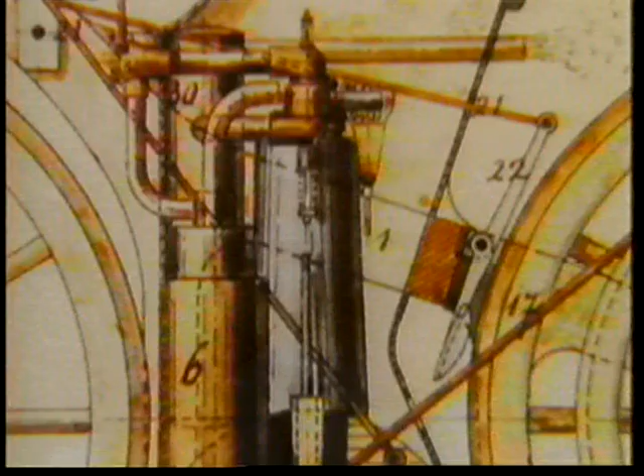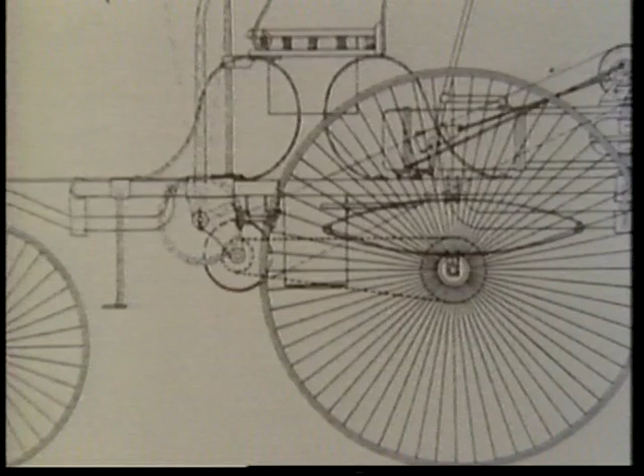Daimler was first to see the wide variety of uses for the gasoline-burning internal combustion engine. The success of his first vehicle, a motorcycle, convinced him that by installing his engine in a carriage, he could finally replace the horse. At the same time, Carl Benz, unaware of the work being done by Daimler only 60 miles away, was developing his own vehicle. But while Daimler was installing his engine in a carriage, Benz was creating the world's first automobile from scratch.

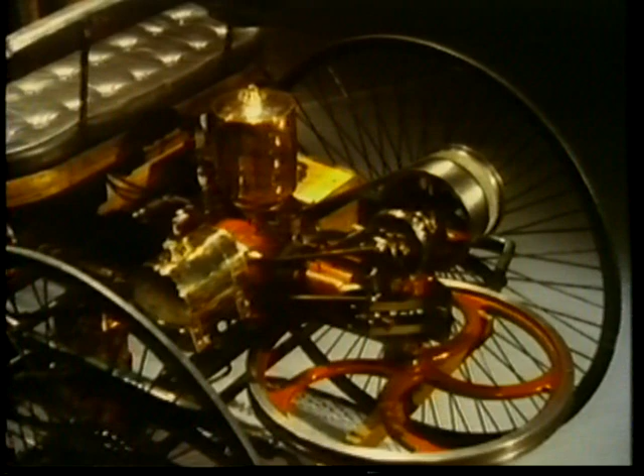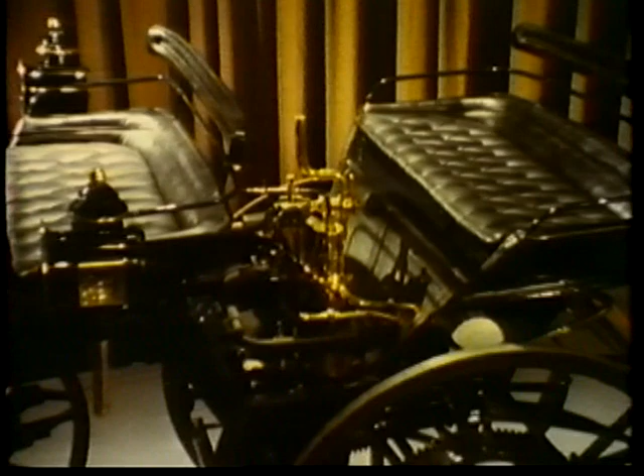It was successfully driven in late 1885 and patented on January 29, 1886, which is the birthday of the automobile. Daimler's vehicle made its appearance a few months later.

Daimler marketed his engines around the world and was especially successful in France, where the automobile caught on quickly. It was in France in 1894 that the first automobile race was held. The 78-mile event from Paris to Rouen attracted both steam and gasoline-driven vehicles and was the first of many open-road competitions that helped establish the practicality of the automobile.

A Peugeot and a Panhard, both with Daimler engines, shared first prize. While Daimler sought new uses for his engines, Carl Benz concentrated on building cars. He was soon a dominant force in the world's infant auto industry.

He considered this Victoria a perfected car. And the Velo became the world's first mass-produced automobile when Benz turned out 62 of them in 1894. By 1900, Carl Benz had built 2,000 cars and was the world's leading manufacturer.

At the turn of the century, automobiles were, to a great extent, still playthings for the wealthy, and the annual Nice Automobile Week held on the Riviera late each winter gave them an opportunity to show off their vehicles.

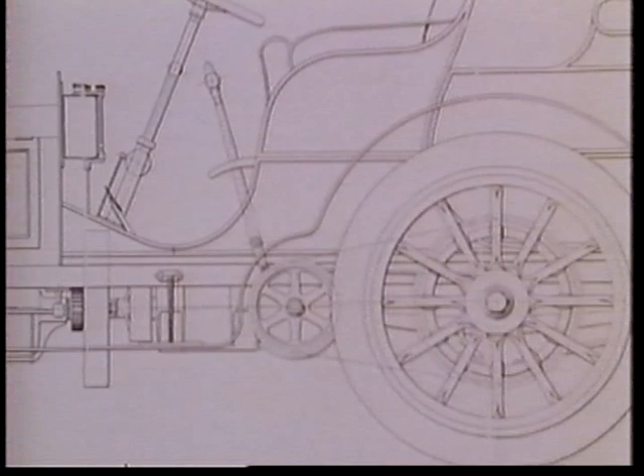Austrian entrepreneur Emil Jelinek, who lived in Nice, was an enthusiast who liked power and speed. And he agreed to purchase 36 cars from the Daimler Company if they would build a model that could compete in and win the Nice speed tests.

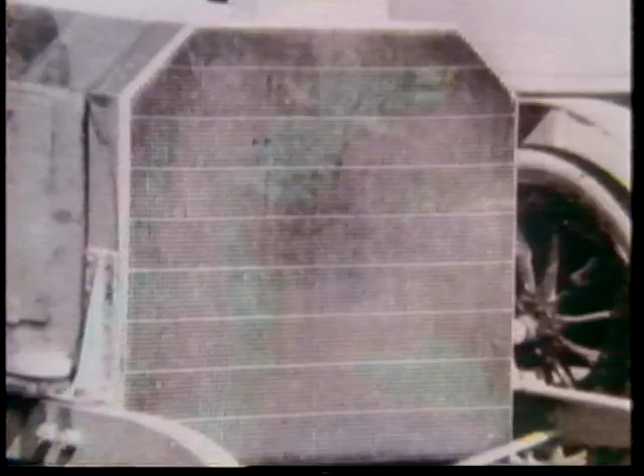Such a large order gave Jelinek certain prerogatives, one of which was to have the new car named after his daughter, Mercedes. Innovative and technically brilliant, the Mercedes dominated events at Nice and was hailed as the car of the day after tomorrow. We had entered the Mercedes era.

To the public, racing continued to be the proving ground for the automobile. And the race of races during the early years of the century was the Grand Prix of the Automobile Club of France.

At the 1908 Grand Prix in Dieppe, Christian Lautenschlager drove his Mercedes to victory while averaging 69 miles per hour. Benz cars finished second and third.

In 1914, a 1-2-3 Mercedes sweep was greeted by silence from the French spectators as relations between the two countries were growing steadily worse. A month later, Europe was at war.

When peace returned, there was a dizzying array of cars to choose from in every country. Mass production, already established in the United States, began to spread across Europe.

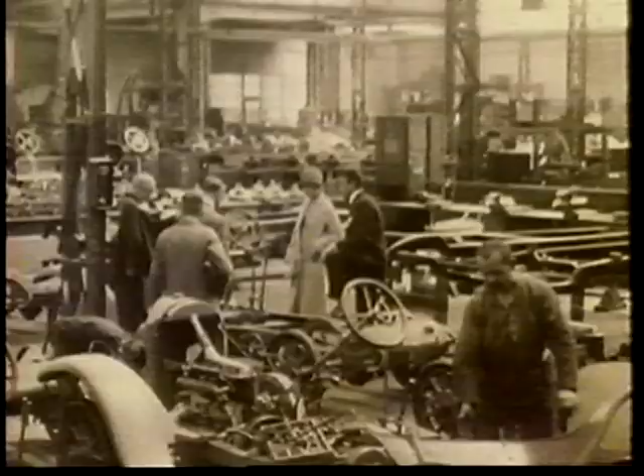In a Germany that lay in financial ruin, there were 86 automobile manufacturers, although few persons could even think of owning a car. For two giants of the industry, Daimler and Benz, the road to survival led to amalgamation, which was completed in 1926.

The origin of the three-pointed star is clouded by time. Some say it began as Gottlieb Daimler's lucky star. Others say it represented travel on land, sea, and air. It now combined with the Benz wreath, and the name Mercedes-Benz appeared on a growing line of cars.

Cars that rolled off the production lines in the 1930s allowed Daimler-Benz to survive this difficult period and remain a major automotive influence.

While the decade began with the introduction of a moderately priced car that featured a revolutionary four-wheel independent suspension, cars bearing the Mercedes-Benz symbol continued to represent the ultimate in power, luxury, and quality.

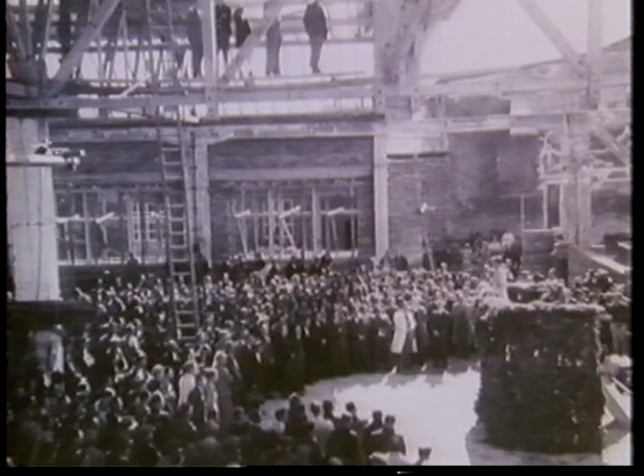But the company's automotive progress came to a halt as Europe was once again plunged into war. On the day the conflict ended, Daimler-Benz had practically ceased to exist. But from the rubble would come a remarkable period of recovery and growth.

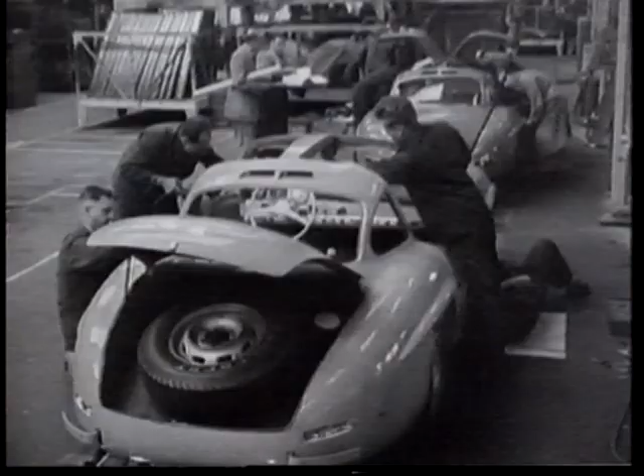In a world anxious to get back to the business of living, automobiles were much in demand, and Daimler-Benz set about doing what it did best, producing fine cars. By the early 1950s, new models were ready for the marketplace.

To help re-establish the Mercedes-Benz name, the company returned to racing. A new generation of Mercedes drivers, led by the legendary Juan Manuel Fangio and including Stirling Moss and Karl Kling, continued the winning tradition.

During the decades that followed, quality was the Daimler-Benz watchword, and the three-pointed star once again represented the best in automotive technology.

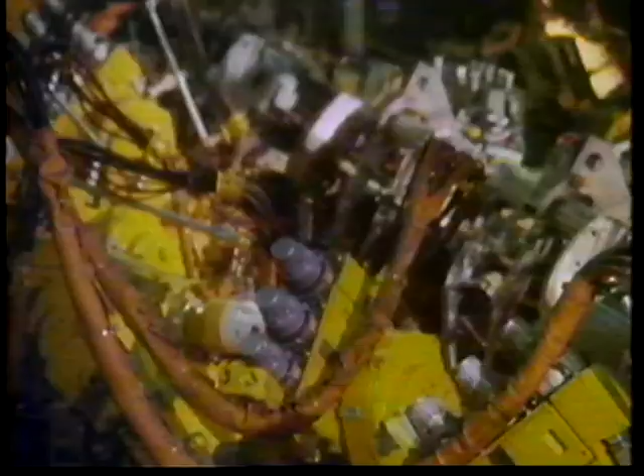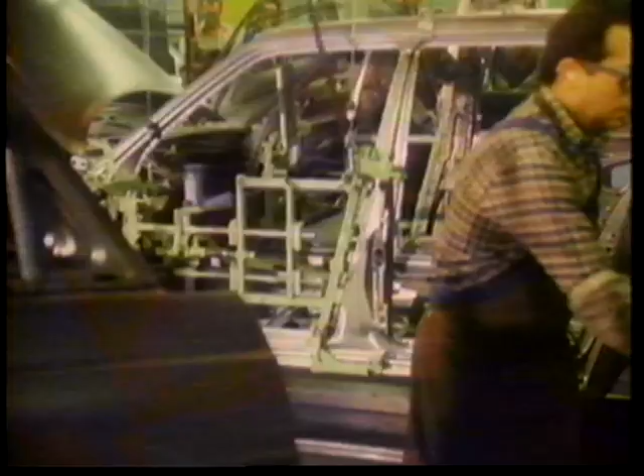From only 214 cars built in 1946, the numbers have grown dramatically. This year, more than 500,000 will roll off the assembly lines.

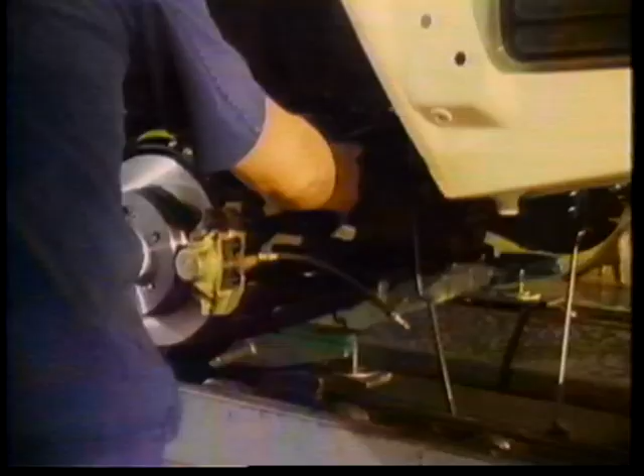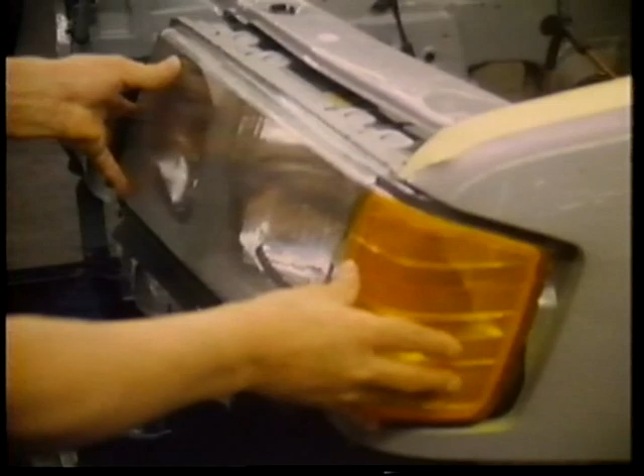The lessons of a century go into the making of every car, truck, and bus. The same hard work and attention to detail that started it all 100 years ago continue to make a Mercedes-Benz the world's most sought-after vehicle.

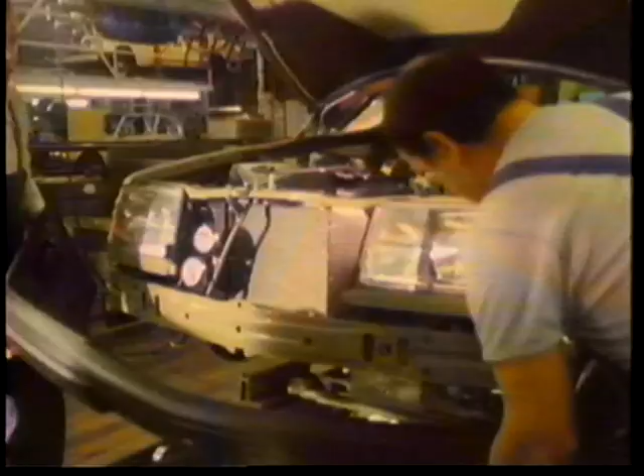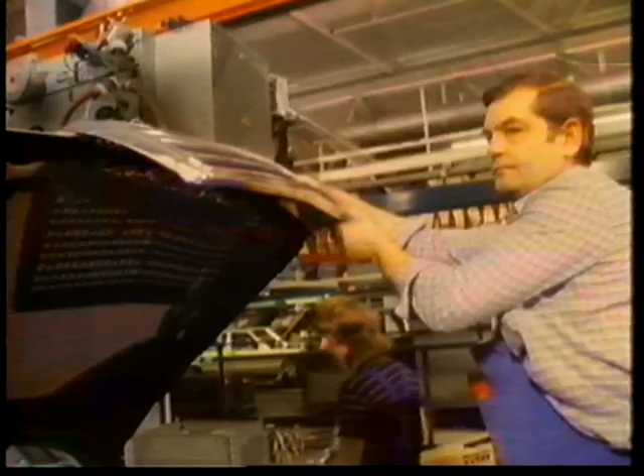As we enter our second century, we do so guided by the words of Gottlieb Daimler, words that best explain our standards: Das Beste oder nichts, the best or nothing.

No other time in Mercedes-Benz history has there been a more complete and more impressive lineup of cars. The primary objective of this section is to give you an overview of the model line.

First, however, we're going to take a moment to be sure you understand the meaning and definition of the model and body style designation numbers and letters.

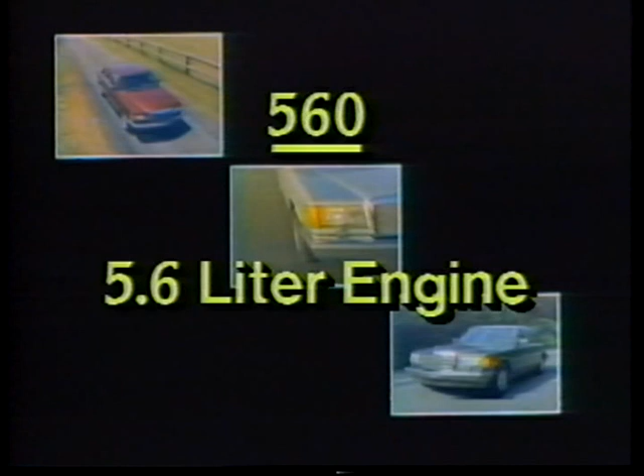In most cases, the model numbers represent the engine size. For example, a 560 is a 5.6-liter engine. The one exception is found in the 190 class. The original European version did, in fact, carry a 1.9-liter engine. When it came to the United States, it was equipped with a 2.3-liter gasoline engine and a 2.2-liter diesel engine.

The letters generally describe engine types, body styles, and the level of luxury features. For example, any car with a D is powered by a diesel engine. And E in the name stands for Einspritz and designates a fuel-injected engine.

S is for the German word Sonder, which means special class and tends to denote luxury appointments, features, and body styles. L indicates an elongated wheelbase.

One exception is the 560 SL. The SL is an historic holdover from years ago when Mercedes-Benz built a race car with a super light SL frame. Thus, the origin of this letter designation.

Finally, T stands for touring or transport and identifies a station wagon.

In your product training, you're going to hear references like the 124 body or the 201. These numbers refer to different body styles. Currently, we have 4, and you should become familiar with each.

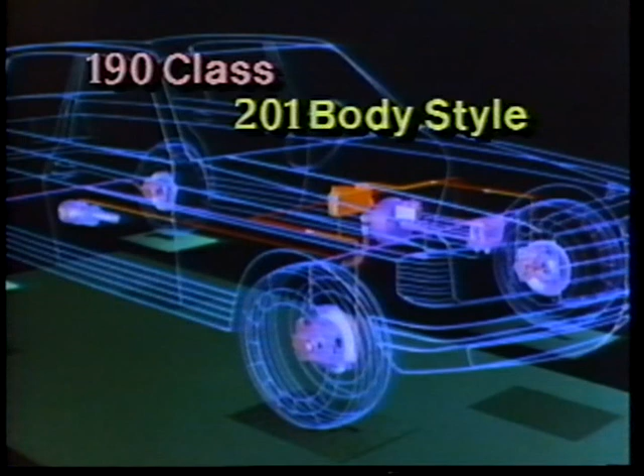Starting with the 190 class, the body style is designated as the 201. The 300 class body style is designated as the 124. The S-Class automobiles have a 126 body style, and the SL is a 107.

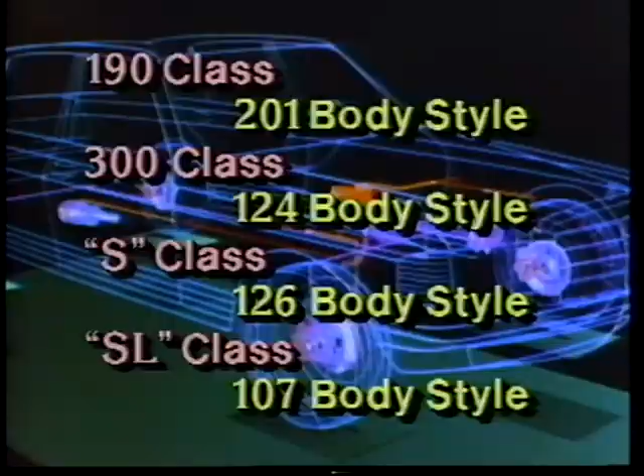Now that you're familiar with the nomenclature, let's look at each of our automobiles. The 190 class is composed of 5 vehicles.

The first is the 190E 2.3 sports sedan, which returns in 1987 with 10% more power. New for 1987 is the 190E 2.6 inline 6 with 158 horsepower of pure performance. This is the first time the 190 class has offered a 6-cylinder sedan.

For the efficiency-minded diesel buyer, we offer the 190D 2.5 sedan. This Mercedes-Benz provides all the benefits of diesel economy and durability, plus remarkably quick performance.

In 1987, the diesel enthusiast will be able to choose a turbocharged version of the 190D, a 2.5 turbo sedan. This is one of the fastest diesels in the world.

Finally, the ultimate 190 class automobile is the 190E 2.3-16. This 16-valve sports sedan is a limited production vehicle offering unlimited driving excitement.

So, there you have the 190 class. 5 redefinitions of the sports sedan idea. 5 classic definitions of Mercedes-Benz.

In 1986, a new class of car startled the automotive world with its blend of speed, silence, and extraordinary performance. In every sense of the word, the 300 class of Mercedes-Benz automobiles is perhaps the most technically advanced in the world. The 300 class is led by the 300E 6-cylinder sedan, featuring 177 horsepower and 0 to 60 performance in 7.5 seconds. From its multi-link independent rear suspension to its ABS anti-lock braking systems, this automobile represents the leading edge of technology.

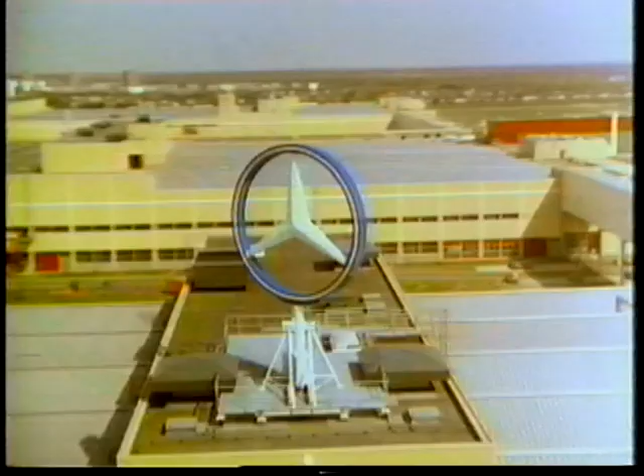The best or nothing. 4 simple words, one uncompromising concept. This was the personal motto of Gottlieb Daimler, and it is the philosophy which guided Daimler-Benz then and which guides us now. This constant striving to improve our automobiles, the effort to push out the frontiers of excellence, is what differentiates Mercedes-Benz. It's the key to a price-value relationship which is unique in the industry.

Unfortunately, many automobile manufacturers are trapped in what we call the commodity syndrome. They sell cars that, for the most part, are nearly identical to those of their competitors. It's a little like selling soap. One product is just about as good as another. There is simply no significant product differentiation.

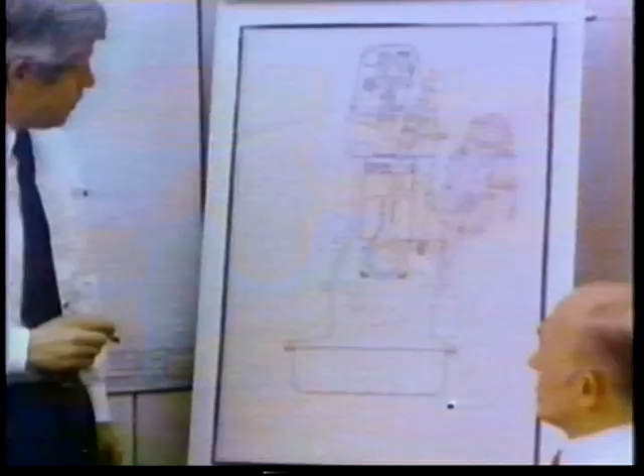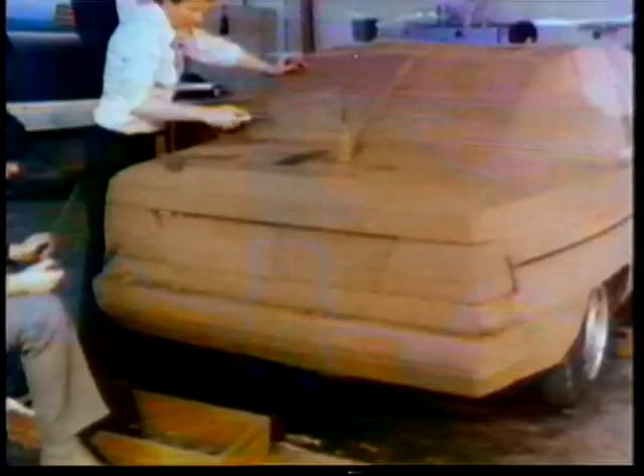Just the opposite is true with Mercedes-Benz. We work very hard to differentiate our automobiles and to build the kind of value into our products that justifies the price. The key to that value lies in Mercedes-Benz engineering. This is where we truly differentiate ourselves from most other manufacturers.

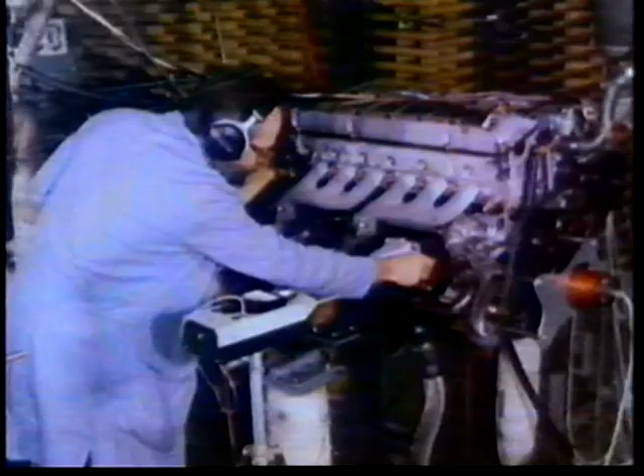To help you begin to appreciate this difference, we're going to provide you with a basic overview of the Mercedes-Benz engineering philosophy as it relates to aerodynamics, body structure, suspension, the interior design, safety, and the power plants.

In designing a Mercedes-Benz, form always follows function. When changes are made in Mercedes-Benz styling, it's because an engineering function has dictated the change. A specific case in point can be found in engineering aerodynamics.

In most of today's advertising, manufacturers relate aerodynamics to fuel efficiency, and certainly this is a benefit of improved aerodynamic design. While we're concerned with fuel efficiency, we're also concerned with the impact aerodynamic achievements have on general safety, handling, stability, visibility, and noise. Let me show you several examples of what I mean.

The contours on the side of the car may appear to be no more than a styling decision. Quite the contrary, it's a functional decision. The reason is that by carefully shaping the side contours of the car, the engineers have significantly reduced the effects

of side winds that can jar a fast-moving automobile to one side or the other. Another example: all Mercedes-Benz automobiles use airflow management to increase the downforce on the front axle, countering the front end's tendency to lift as speed increases. This results in increased stability at higher speeds.

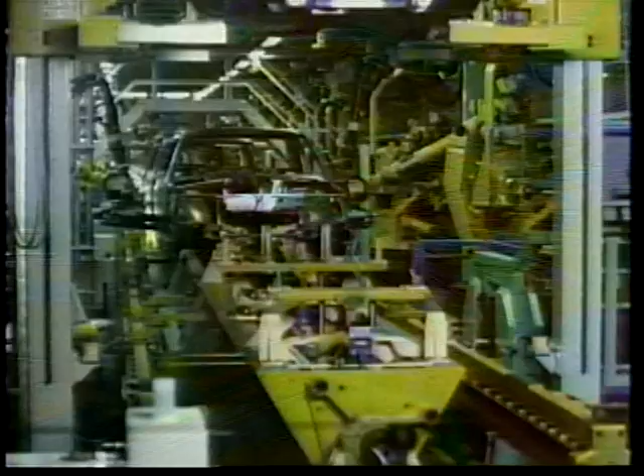Another component of Mercedes-Benz engineering philosophy is reflected in the body structure. Here, the design criteria calls for a rigid passenger shell to protect the occupants in the event of an accident. At the same time, it has to be light enough to contribute to overall fuel efficiency.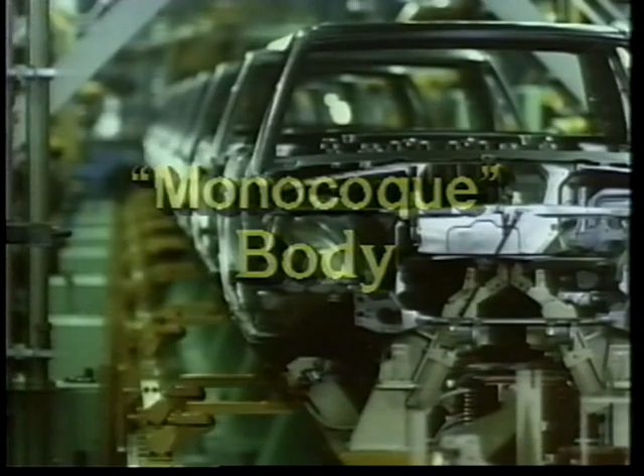We pioneered what is known as the monocoque body. This is a single structural unit that offers exceptional rigidity. Virtually every major manufacturer has followed our lead in this area.

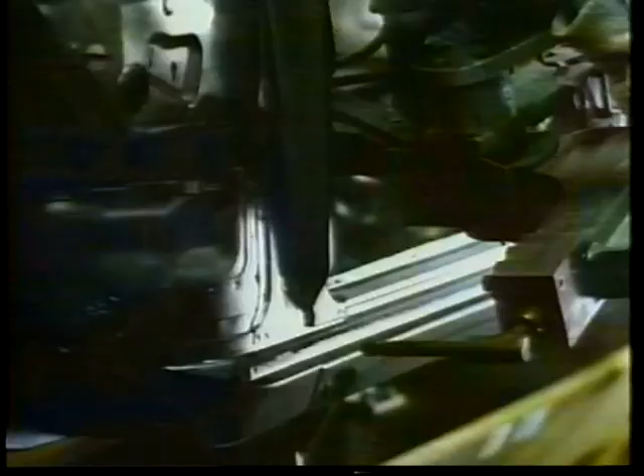However, in striving for the best body, we may use up to 6 types of metals, including a new high-strength, low-alloy steel that is significantly stronger than conventional sheet metal. The result is greater structural strength, less weight, and more corrosion resistance.

What the customer sees, of course, is the extraordinary fit and finish of the automobile. The philosophy here is simple. We combine the latest technological advances with the dedication of expert craftsmen to produce automobiles of unparalleled quality.

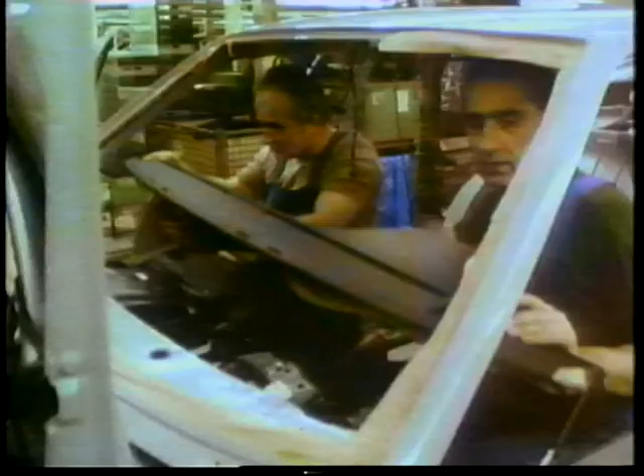In other words, we let the robots do what they do best, the tedious, repetitive jobs that call for day in and day out exacting consistency, and we let the skilled workers concentrate on the demanding, time-consuming, fine finishing that is a hallmark of all our automobiles.

The engineering philosophy that governs our suspension systems is one that at first seems contradictory. We want all our automobiles to have the agility and nimbleness of the single-purpose sports car, yet with the smooth, comfortable, stable ride that is associated with the luxury sedan.

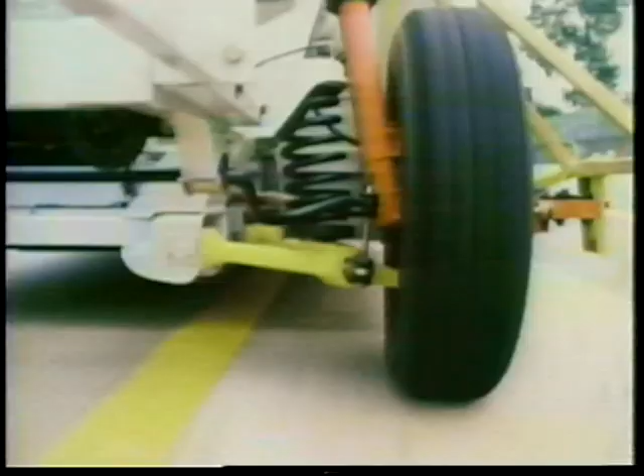The secret of the Mercedes-Benz dual personality lies primarily in the type of suspension employed by the engineers. Every model benefits from a fully independent suspension. The specific design may vary from model to model, but the results are the same.

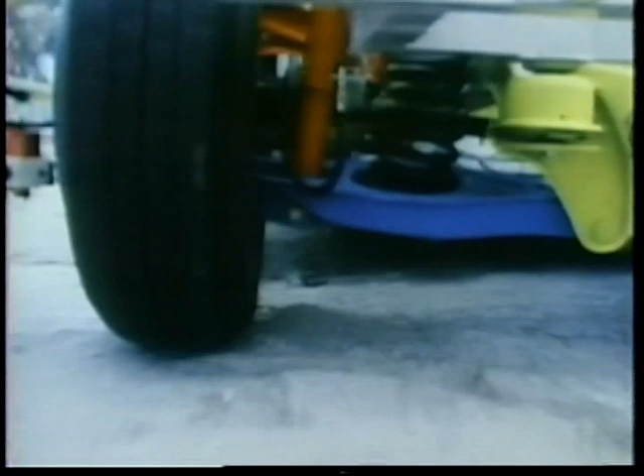The main advantage of a fully independent suspension is the ability to allow each wheel to react independently to every bump and dip without affecting any other wheel and without transferring the jolt to the body. Fully independent suspension also improves handling responsiveness by keeping the maximum possible tire surface on the road at all times. When one wheel is kicked up by a bump, the other 3 remain in firm contact with the road surface.

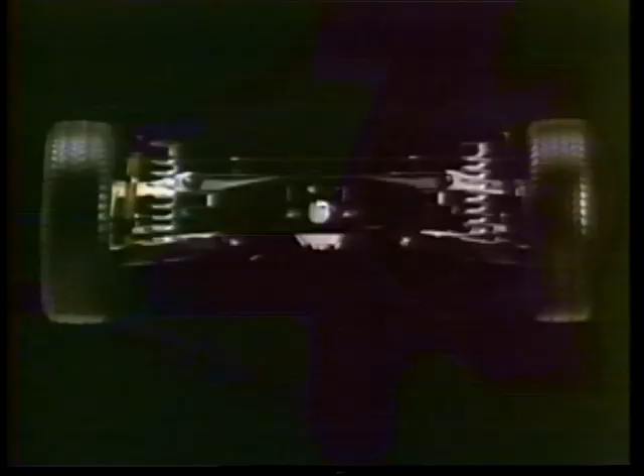Our 5-link rear suspension design has the ability to move the rear wheels through a controlled, predictable pattern so that bumps or lateral forces create minimal impact on steering control. You can read more about this and the other suspension systems in your product information manual.

When it comes to the interior of a Mercedes-Benz, the engineering philosophy is guided by safety, which we'll talk about in detail in a moment, and by the science of ergonomics. Ergonomics is the science of making man and machine more compatible. As you sit behind the wheel, you begin to understand how that translates to a Mercedes-Benz.

All the controls fall easily to hand. You don't have to lean forward to turn on the radio or adjust the climate control. Everything is within easy reach.

When it comes to the seats, you'll find them firmer than those in most cars. The reason simply is because a firm seat can provide more orthopedic support. This support helps minimize physical fatigue during long drives, which helps keep the driver more alert, and at the same time provides lumbar support for the millions of Americans with back problems.

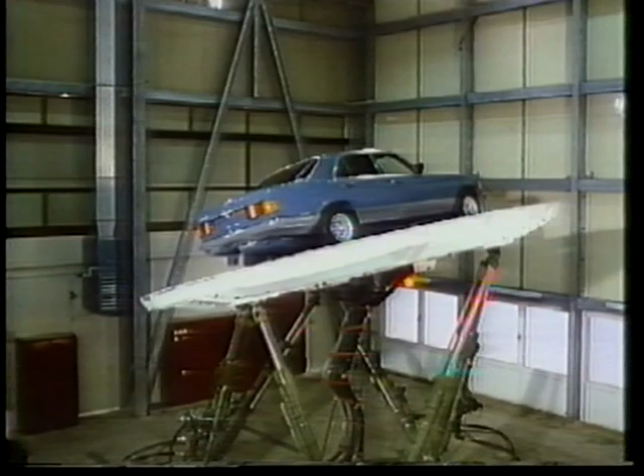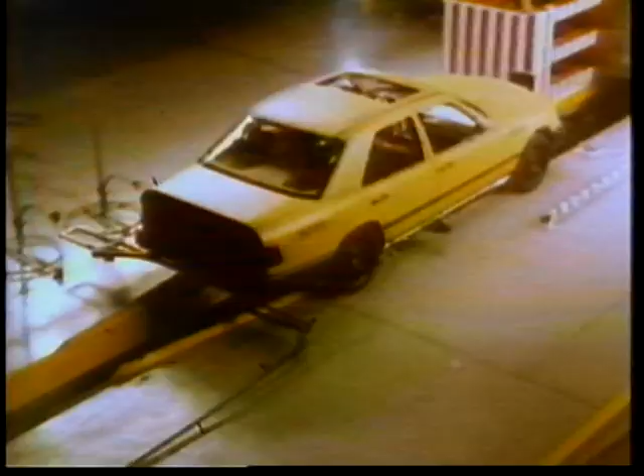While the best or nothing is our philosophy, the passion for safety is our commitment. As you may know, the federal government began placing an emphasis on automotive safety in the late 60s. Mercedes-Benz, on the other hand, has been seriously studying ways of protecting the occupants of our automobiles since the 1930s. Today, our automobiles not only meet all the federal safety requirements, but in some cases we exceed them.

Basically, when we talk about safety, we refer to 2 types, active and passive. Active safety refers to those features and systems which give the driver the ability to avoid accidents. Passive safety is the automobile's capacity for protecting the occupants.

Let me give you several examples of each, starting with active safety. First, there's the steering and suspension systems, which permit the driver to make sharp, evasive maneuvers at high speeds without losing control of the automobile. This is not something you'd want to try in an ordinary car.

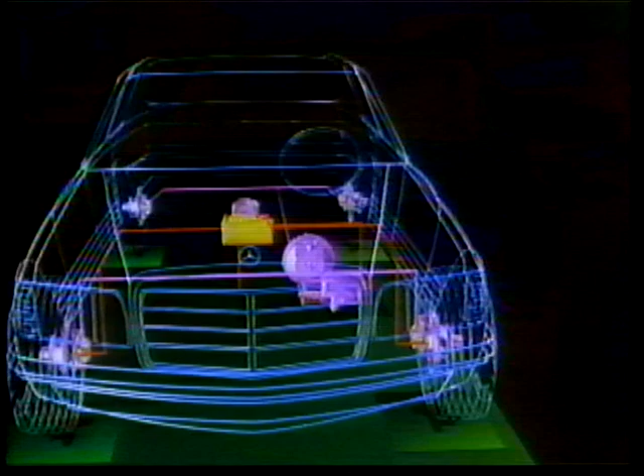Second, Mercedes-Benz offers the anti-lock braking system, generally referred to as ABS. This comes standard on all our automobiles, with the exception of the 190E 2.3 and 190D 2.5, where it is offered as an attractive option. Now let me show you a film that explains the system and its benefits to your customers.

It's absolutely incredible, I've never experienced anything like this. Going into it at 40, 45 miles an hour, I fully expected to lose control. It was fabulous, I stayed on the brake all the way through the turn. It felt very secure, very controlled. I was amazed. I wish I had it on my car right now, to be very true with you. I'd feel a lot safer.

At first, you might wonder what all the excitement is about. The driver slams on the brakes, and it comes to a dead stop. It looks easy, until you see a competitive car without the anti-lock braking system try the same thing. As soon as the wheels lock up, the driver's lost control. Even in those instances where it's not necessary to come to a full stop, the ABS system helps you maintain control in the turn.

Without ABS, your automobile becomes a sled. No matter how hard he tries, with the wheels locked, it's virtually impossible to control the direction of the car. To help you better understand the anti-lock braking system, we set up a test to create a situation in which surface conditions vary on either side of the road. The driver is approaching the skid area at about 45 miles per hour. He hits the brakes and the wheels lock up. Steering control is virtually impossible. Now watch the Mercedes-Benz with ABS. Same speed, same conditions.

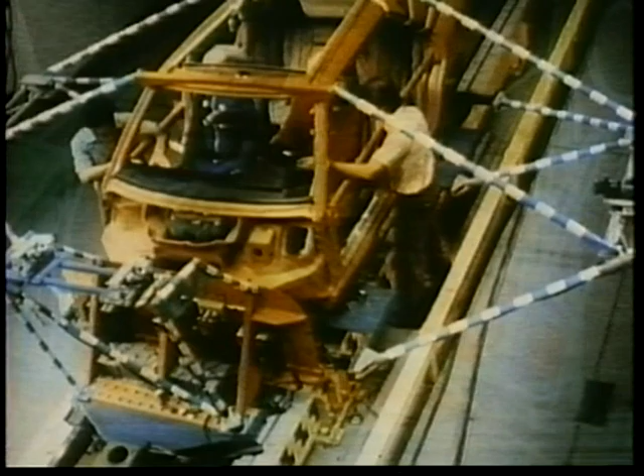Now let's look at passive safety. The first and most obvious example of passive safety is our supplementary restraint system.

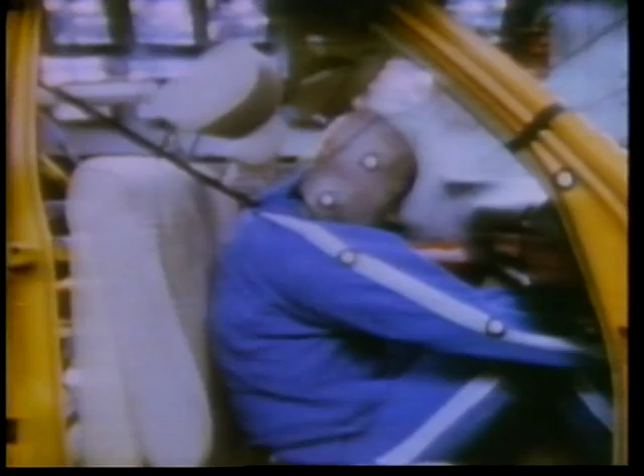Automobile passenger safety has received increasing attention in the United States in recent years. At Mercedes-Benz, passenger safety has always been of great concern. The company built a safety prototype as far back as the 1930s. Today, every Mercedes-Benz automobile carries as standard equipment a comprehensive passenger safety system. The Mercedes-Benz philosophy embraces both active safety, helping the driver to avoid trouble before it happens, and passive safety, measures designed to help protect the car's occupants if an impact ultimately should occur.

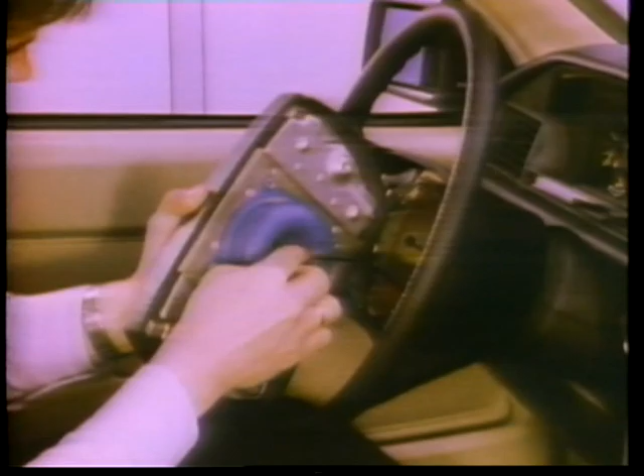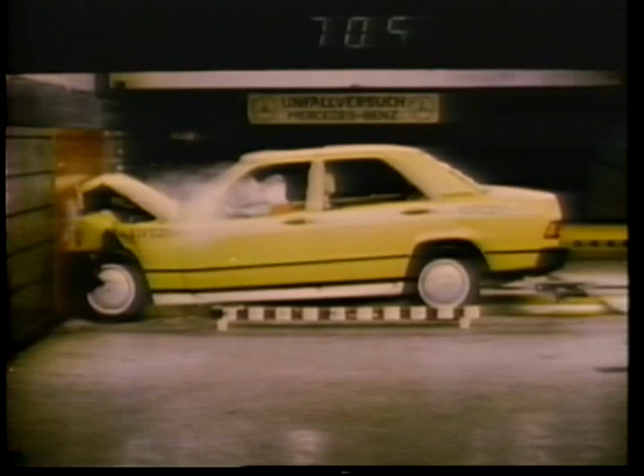Standard on all Mercedes-Benz automobiles is the Supplemental Restraint System. SRS consists of a driver's side airbag and padded knee bolster, supplementing the driver's seatbelt. ETR, or emergency tensioning retractors, is also standard in every new Mercedes-Benz. In the event of a major frontal impact, the ETR is designed to instantaneously and automatically tighten the driver's and front passenger's three-point seatbelt, thus enhancing occupant restraint. A major frontal impact triggers a sensitive electronic device which signals the airbag to deploy and inflate fully within a fraction of a second, cushioning the driver's head and upper body and minimizing risk of contact with the steering wheel.

Simultaneously, of course, the emergency tensioning retractors, ETR, tighten both front seatbelts. The entire sequence takes less time than the blink of an eye. 15 years of development and 450 million miles of use worldwide attest to the precision and reliability of this restraint system. In the unlikely event that the system were to be triggered accidentally, normal driving functions could continue.

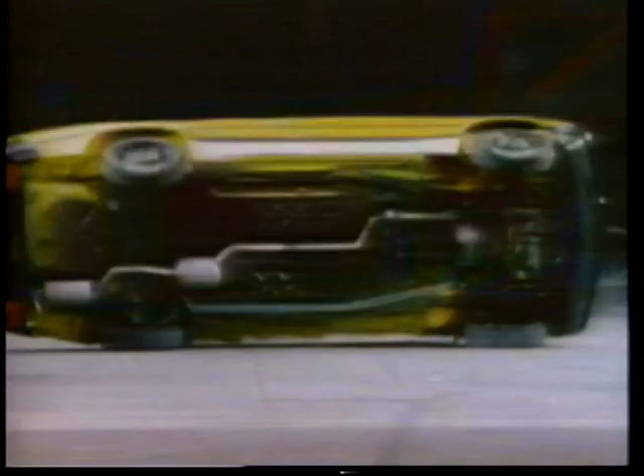Fore and aft body sections are carefully designed to progressively yield under the force of a major impact, absorbing kinetic energy before its full force can penetrate to the passenger area within. The fuel tank is mounted deeply inboard. The steering column is designed to yield in a front or oblique impact. This advanced design, along with features such as SRS and ABS, give the Mercedes-Benz owner an extra measure of safety.

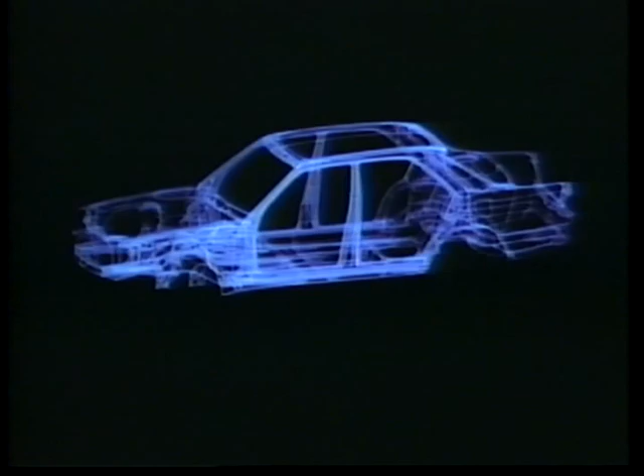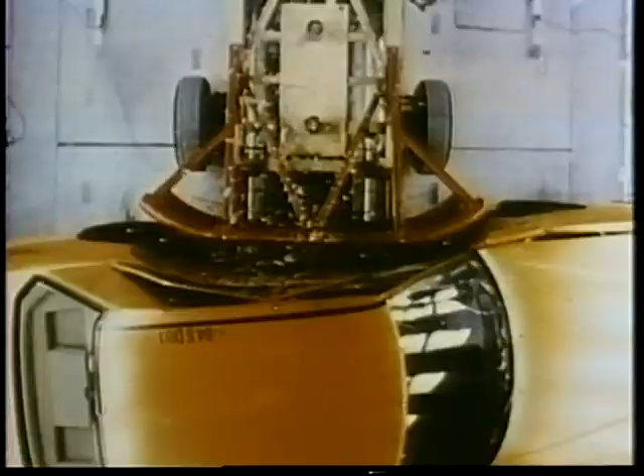In addition to the supplemental restraint system, a Mercedes-Benz is designed to provide optimum protection to the passenger in the event of a severe accident. To begin, as we've already pointed out, the passenger shell is extremely rigid. This rigidity gives it the ability to resist crushing in a rollover or side collision, thus providing the greatest possible protection for the occupants.

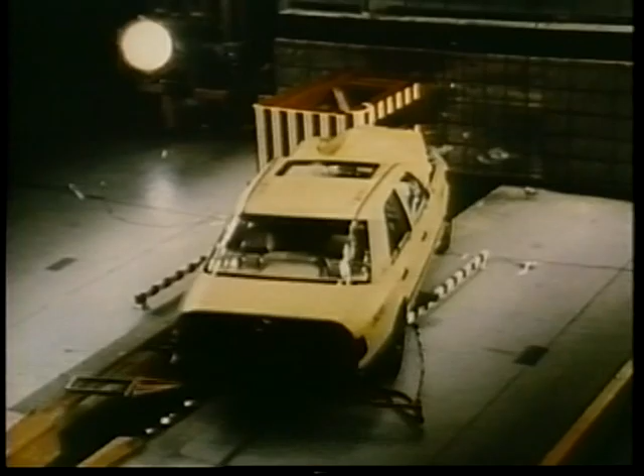In the event of a front-end collision, the front end has been designed with crumple zones, which permit the car to literally crumple at a controlled rate to help absorb some of the force of the impact. Finally, the steering column is designed to collapse under impact to help reduce the possibility of severe driver injury. What we've shown you are just some of the ways that Mercedes-Benz engineers exhibit their concern for active and passive safety. This brings us to the last item on our list, the power plants.

Once again, the best or nothing is the guiding philosophy. We build two different kinds of engines, gasoline and diesel. Each is matched to a specific car in the model line, and each reflects the basic character of the car it serves. Because of the time limitation on this tape, we're going to confine our engine presentation to a brief overview. Let's start with the diesels.

First, we have a 5-cylinder, 2.5-liter diesel engine with an overhead camshaft and mechanical fuel injection. While many non-Mercedes owners tend to think of a diesel as slow and lacking response, our 2.5 provides surprising responsiveness at a remarkable level of fuel and operating efficiency.

For increased performance, we offer a 2.5 turbocharged version of this engine, which boosts the horsepower by 33% and the torque by 38%. The third engine is a 6-cylinder turbocharged diesel with a displacement of 3 liters. The key thing to remember about this engine is that it compares very favorably with many gasoline engines in performance, while delivering overall maintenance and operating economy far in excess of most gasoline engines.

The first of our gasoline engines is an inline 2.3-liter engine that develops 130 horsepower. It offers a combination of mechanical electronic fuel injection, KE-Jetronic, which provides good engine performance, fuel economy, and low exhaust emissions. If for any reason the electronics should fail, the mechanical system will take over and let the driver get to a service facility. This is followed by our 2.6-liter inline six-cylinder engine.

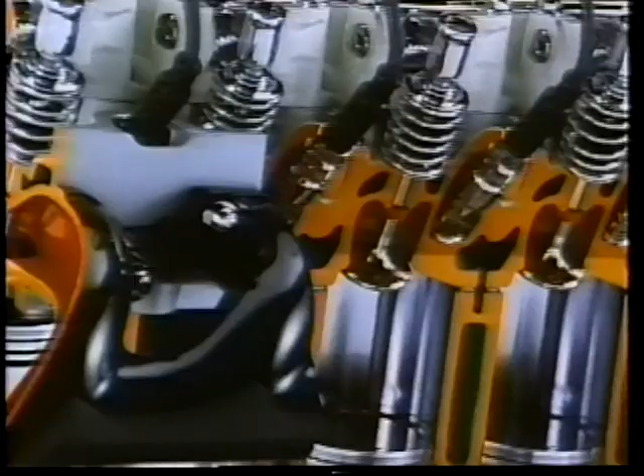It delivers 158 horsepower and 162 pound-feet of torque. It's available with either a 5-speed manual or 4-speed automatic transmission. Next, we have a 2.3-liter power plant with 16 valves. What this means is that each of the 4 cylinders has 4 valves, 2 for air intake and 2 for exhaust. This allows for a 25% increase in airflow through the combustion chamber, which leads to a significant increase in performance. Specifically, 167 horsepower and 162 pound-feet of torque.

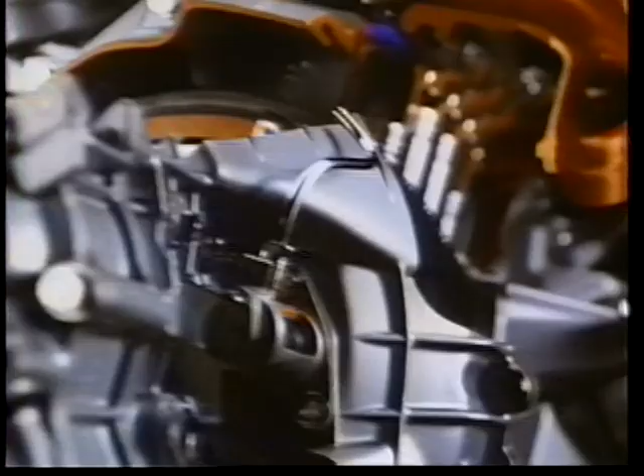The 4th engine is a 3-liter inline 6-cylinder gasoline-powered engine. This engine produces 177 horsepower. Like the 4-cylinder, it has mechanical electronic fuel injection, KE-Jetronic. This is a proven injection system which measures the air entering the engine. This system is able to constantly fine-tune the mixture of air and fuel to assure peak performance and minimum emissions under all types of load and weather conditions.

Finally, we have 2 V8 engines. The first is a 4.2-liter with single camshafts over each bank of cylinders. It too has mechanical electronic fuel injection, KE-Jetronic, along with electronic ignition. This is a microprocessor-controlled system that determines the best and most precise ignition times for maximum power output and fuel efficiency. The top of the line is our 5.6-liter V8. It offers all the benefits of the 4.2-liter engine, but with an additional 1.4 liters of displacement. To put it simply, this engine represents the state-of-the-art in engine technology.

Okay, so there's a quick review of our engineering philosophy and its applications to the systems in our vehicles. Between now and the time you begin your formal product training, you should study your product and sales information material and take the time to look at the owner's manuals in each car. These will provide a great deal of detailed information. Remember, many of your customers consider themselves experts when it comes to Mercedes-Benz. You'll go a long way toward winning their confidence and their business if you can demonstrate that you're the product expert that they expect you to be.